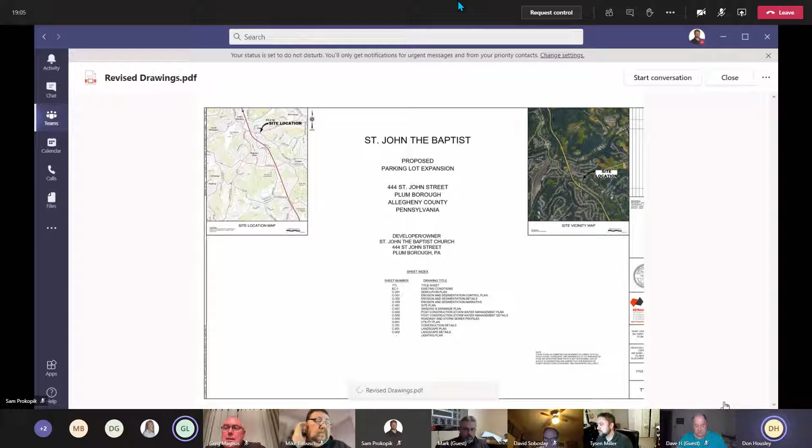There will be the necessity for a county HOP permit onto Unity Center Road under SALDO subsection 422. Again, a third-party item, condition of approval is standard for that type of issue.

On page 10 of 15, subsection 718, sub B, sub 1 of the SALDO, survey markers are required to be set on all lot corners, the perimeter lot corners. There is a modification requested of that to allow the current markers that are in place.

There's a ton of corners on this property. In my opinion, as a professional land surveyor, there are sufficient markers there to satisfy the intent of the ordinance of leaving control behind. So I would support that modification as a second modification, along with the sidewalk that was just discussed.

Under the stormwater ordinance 501.c sub 5, the Allegheny County Conservation District Erosion Sedimentation Control Plan occurs along with the NPDES permitting. However, that is also a third-party type of conditional approval, so that would be a standard condition. As-built drawings are required at the end of the project, and that'll be part of the developer's agreement that David will prepare and the church will sign off on. Also, an O&M agreement will be required to be filed with the Allegheny County Department of Real Estate prior to the issuance of any grading permits for the property.

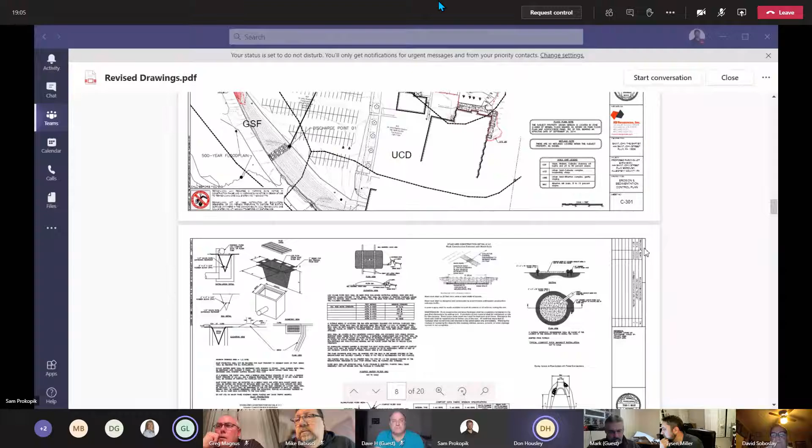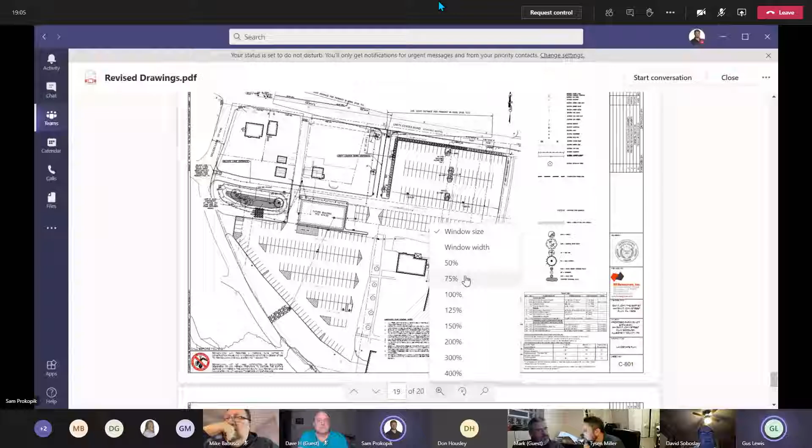Yeah, that's actually where I saw it. So, one up. There you go. Let me know if you want me to zoom in or anything of that sort. Yeah, Sam, if you can zoom in right at the Miller's Lane parking lot there. Well, maybe it should show up. That might be a drafting error. Is that good, or can you guys all see that? Yeah, that's an older version.

I see. I'm sorry, yeah, we did have a triangle there at one point, and then when my engineer was researching it in the PennDOT publication, it had that text, so he added that text to the plan. But if that's still a concern, we can certainly show a triangle, a sight triangle, for a 25-mile-an-hour road or something of that nature, or sometimes we do profiles along those sight triangles. So, happy to provide more information there if that's not clear.

I think to the right as you pull out of there, it's actually improved because you moved up from the bend, but it kind of looks like it made it worse as you look to your left to pull out of there. So I was just curious, have you studied that based on that triangle?

Mark, this is Don Housley. I can tell you that I wrote these down because they were on the most recent revised set that I have, and I made a note of it here. To the left, I have 265 feet, and to the right, I have 236 feet. So to the left is actually longer than it is to the right.

Okay, I hadn't had the chance to drive by there, to be honest with you, but it just intuitively didn't seem like there was that much with the drop off. It seemed like a rising blind bend.

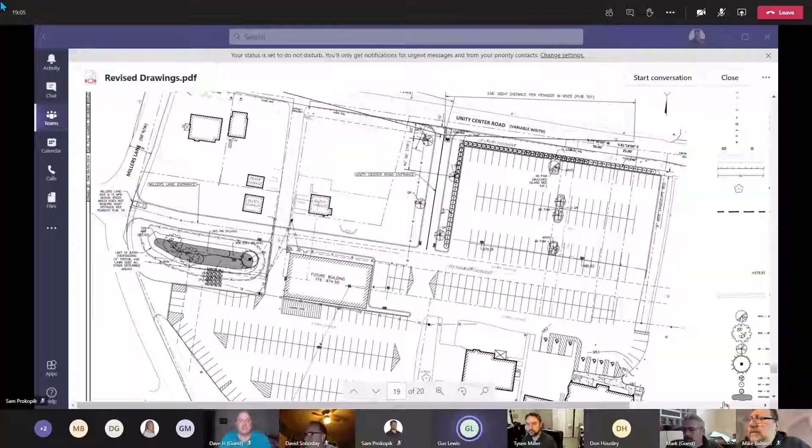So the sidewalks are not an issue. We'd like to see some profiles on the exit there. And then Don's letter dated January 14th, 2021, and the waiver for the pins as well as the waiver for not having the sidewalks are all part of the motion.

Is anyone like to make a motion? I'll make a motion, we accept. Gus second. Nathan second. Is there any opposition? Motion carries.

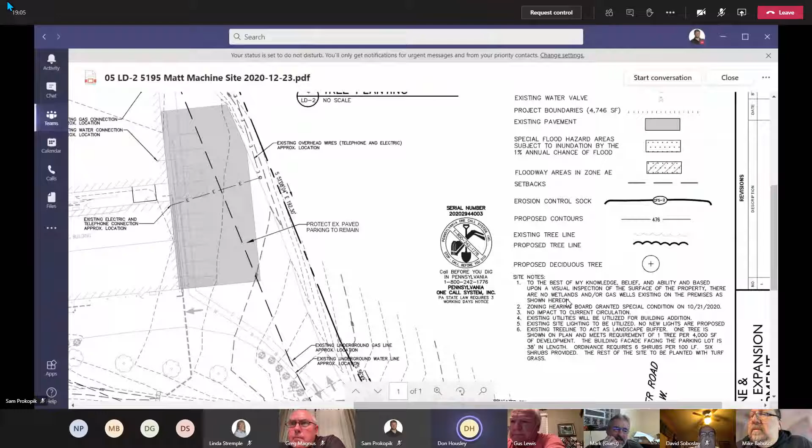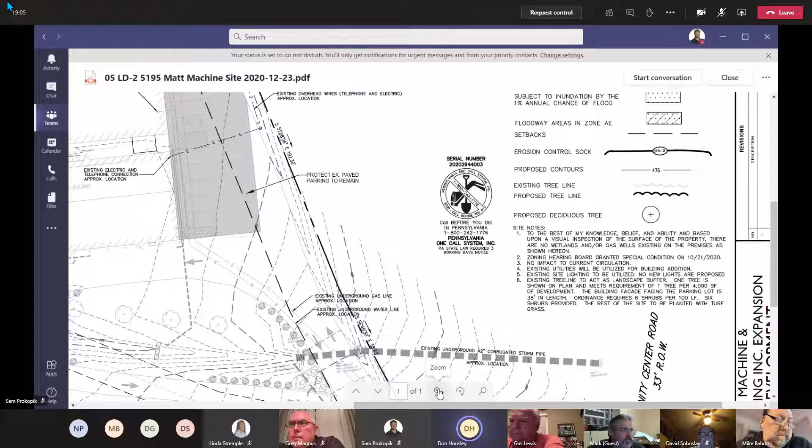No wetlands, no gas wells. Pretty sure there was a note somewhere, I'm just not recalling exactly where, but you can see above that in the text they show you where the floodways and areas zoned AE and the 1% annual flood are, if you look up above with those notes. And then you can look around the drawing for those designations of floodways. So there's nothing near this building site.

They actually sit up on a bench above the stream that's down below in the middle of the property. Yeah, there it is on your left side—see it coming into play? Okay, those are the limits of the floodplain then. Yes, sir. Okay, all right.

Well, Dave, what do we do with this? We approve, take a vote to approve it, or? The request is for preliminary and final land development, and the motion would be to approve it with or without any conditions. Do we have any suggested conditions at all? I do not have any. Okay, any comments from the commission?

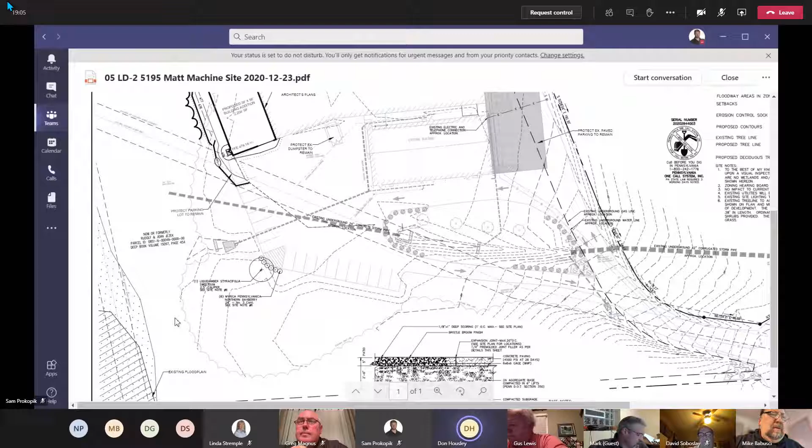Moving on to item number 3, Veltre's Italian Kitchen. Conditional use 02-20.

Dave, are we going to handle this along with the site plan at the same time, or do we have to take two votes? Yeah, we'll do these separately. Okay, and I know we have, waiting patiently online, Dan Graper with us from Theringer, McCarty, and Gray, and he's going to present this. So we'll start with the conditional use.

And Dan, if you want to walk the planning commission through how we arrived at this conditional use. Why are you applying for a conditional use and not just a restaurant approval?

Sure, okay, can you guys hear me? Yes. Okay. So, as Dave mentioned, Mr. Veltre is proposing a 2,260 square foot takeout only restaurant. There's no dine-in, it's pickup only, and so that is the reason we are requesting conditional use. There's no parking requirement in the code specifically for takeout only dining, and so we've performed a parking demand analysis, and along with that, we are requesting conditional use for 19.

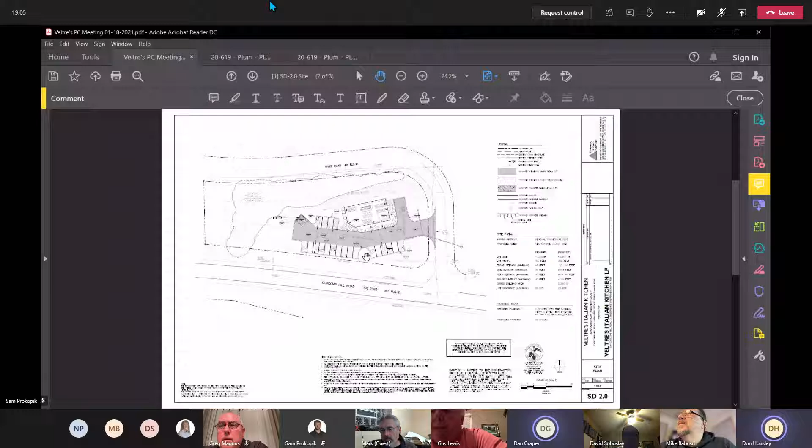Is this going to be a self-standing restaurant, or are they going to be shuttling food, supplies, equipment back and forth between Veltre's Event Center? Are they preparing food right in this building? Correct, this would be a freestanding, separate facility. It's essentially a takeout pizza shop. They're going to have more than just pizza, of course, but it's essentially just a pizza shop.

So Dan, my understanding is that Mr. Veltre has another location in the area, and he's lost his lease on that area, and he plans to relocate that to this building, correct? Yes, that's correct. His existing shop is down in Oakmont. As you said, his lease is up, so he's moving up the hill to here.

So as far as our ordinance is concerned, Mark Allison, we don't have a specific use for takeout, but we do allow the applicant to apply for a similar use, which they have done here. They did have, as part of this, a parking demand analysis done, which we can talk about during land development too. But as far as the conditional use, the use of this property is concerned, it is what they have done is permitted by ordinance. And I don't know if Mr. Housley has any comments about the conditional use review.

If I may, before we go to Don, is this a similar situation that we had with the drive-through coffee place down on 286? We had an amount of parking that was going to be required, it was a drive-through. I just thought we had something in our ordinance that kind of dictated what was happening there.

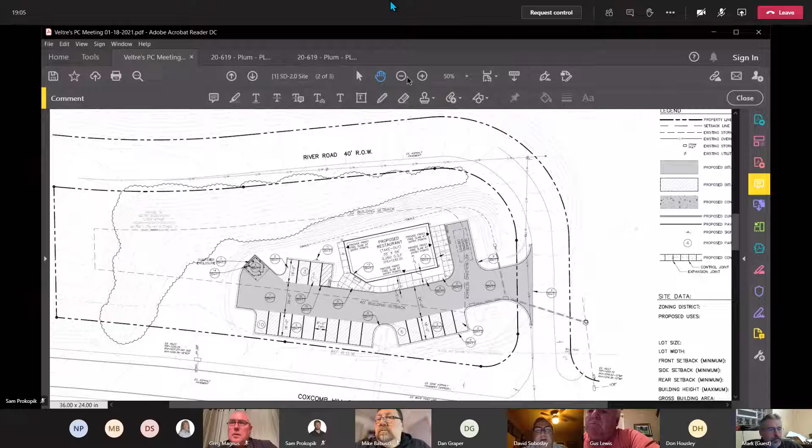I'll just turn it over to Dan Graper. Dan, if you just want to walk through your site plan that we have up here. If you want us to change the page, just let us know. Sam, if you want to go back to the first page so we can see the elevation that they're proposing. This time I have no questions or comments. Mark: all right, I'll turn it over to Mr. Graper. That's fine, thank you.

As you can see on your screen there, there's a perspective of the building. It's metal roof and metal siding. There's some masonry along the lower parts of the wall. You can see the door locations and plenty of windows, and there's some nice detail there with the accent work, with the exposed trusses, and then that canopy in the front.

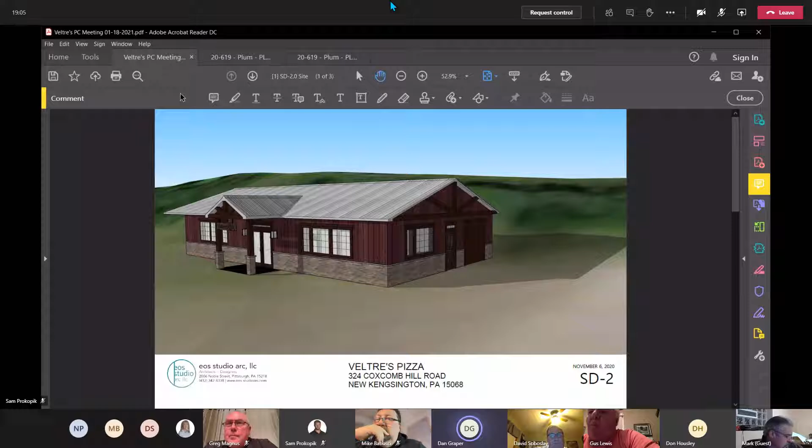Let's move to the site plan if you don't mind. So the parking lot is in the front of the building there—19 parking spaces proposed, as we just talked about. Concrete sidewalks most of the way around the building. We have a flush entry on the right-hand side, off of a loading and service space. There's one ADA parking space, off to the left there.

And then there is a drainage swale across the back of the building that drains to the right to a stormwater BMP. We're compliant with all the building setbacks, the lot size, the frontage, maximum coverage, building height, all of that stuff.

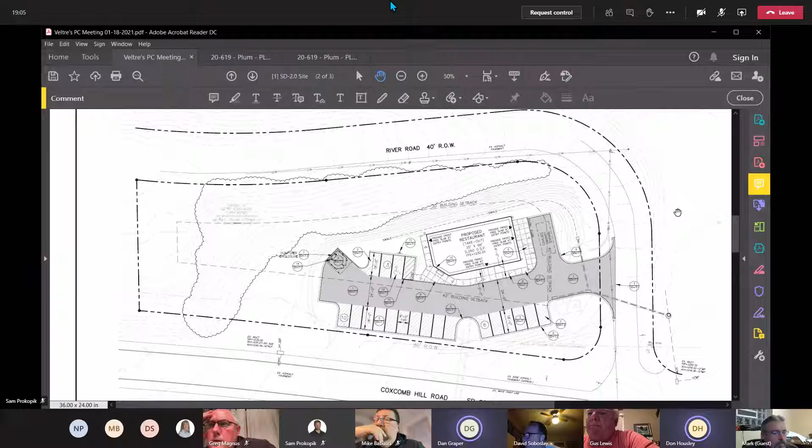Let's move to the next slide, if you don't mind. So here's the landscape plan. We're proposing 8 trees and 31 shrubs, along with some mulch, lawn, and river rock areas.

Some of the critical steps for the project timeline: we've submitted to the Allegheny Conservation District for E&S approval. We're under an acre, so it's not an NPDES, it's a non-permitted E&S. We've submitted to PennDOT for the utility HOPs we'll need for tying in at the road, for water and gas. We received initial comments from Mital, your reviewing engineer, on December 21st, and we responded—I think we've addressed the vast majority of them. January 4th is when we resubmitted.

That was pretty much all I had. If there are any questions, I can answer them.

Are you proposing any type of roadside signing? Well, correct me if I'm wrong, but I believe the signage would be a separate approval from this. Usually we have a separate permit for that, but Mike, are you asking if the sign is going to be somewhere impeding the sight line coming out of River Road? Well, I'm concerned about that, and I think lately along this road we've had some signs, and Veltre's is one of them, that are rather glaring signs. Wasn't there complaints that we were getting about that before, or am I imagining something?

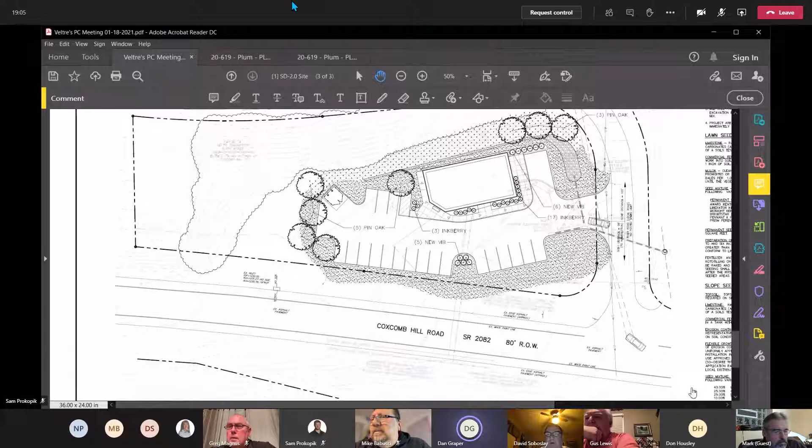Just for the planning commission's sake, I don't know, Sam can pull that up. I'm pretty sure the closest hydrant is just across Coxcomb Hill Road, right where River Road exits out, so it's right across the roadway there. Yeah, I can show you on our GIS if you'd prefer. I'm not sure if you can see my cursor, but it's roughly right around where my cursor is right now. That's correct, Sam, it is.

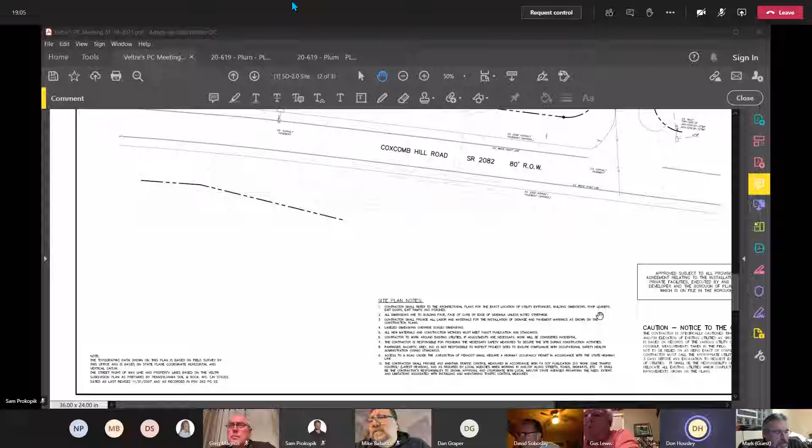Dan, inside the building, is this going to be like a larger storage area, possibly even for the event center, that they have a garage door on it? Certainly not that I am aware of — I don't think I've seen an actual floor plan yet. I'm just a little curious because this is quite large for just a pizza takeout place, and then have that door, and then be willing to spend the money for additional parking. I just wonder if there's a future use in mind.

Okay, yeah, I'm not sure. And the overall concern with the future use is the fact that they're going to do a holding tank. I wasn't able to make contact with the Allegheny County Plumbing Department to understand what's involved with the holding tank for the sanitary system. Okay, yeah, I know we've done a few holding tanks recently, but I've talked to Tony about this, and he's well aware that in his mind and everyone's mind, that's a temporary solution. He absolutely plans on tying into the sewers at some point. I mean, I assume he has it at the event center.

He does not have sewage at the event center. Oh, he does not? Not public sewer, no. Okay, that's interesting. Dave, what do they currently have at the event center? Is it a leach bed or a sand mound there? It's a holding tank, I'm pretty sure. Just a tank, no leach bed or sand mound there? No, the holding tank gets pumped out periodically.

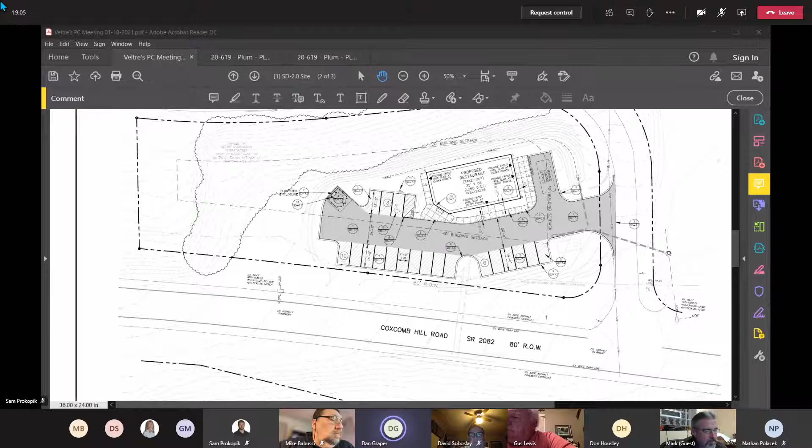Moving on to item number 5, Pearson Run Road, Place of Worship, site plan 07-12. David, would you introduce that for us, please? It's a request for preliminary/final land development for the construction of a 3,300 square foot addition to an existing place of worship. This is on Pearson Run Road. The property is 4.16 acres in size and is zoned single family.

At this time, we did receive a letter dated January the 11th from the applicant requesting this be tabled until the February meeting. Evidently, the size and location of the addition has changed since we received our initial set of plans, and they would like more time to modify those drawings and get things right for us.

Sounds good. Do you have a motion to table this project, site plan 07-12? Make a motion. Yeah, table it. Do I have a second? Magnus will second. Any opposition to tabling this project? Motion carries.